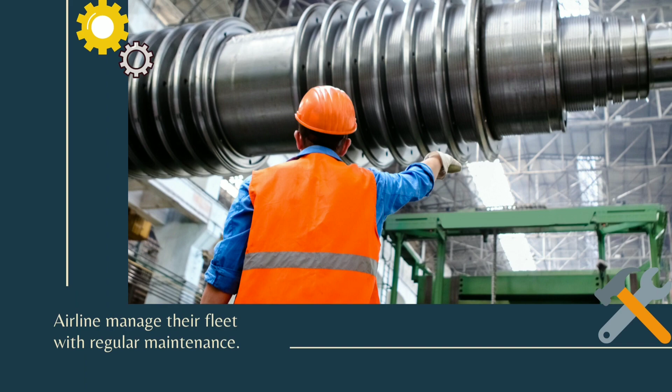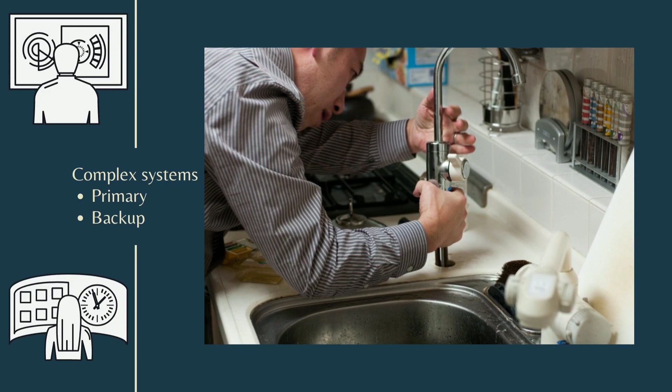Maintaining an aircraft is a never ending process. It is easy to forget when you board a jet aircraft that what you are stepping onto is one of the most complex machines ever created. Every airplane is a tuned machine that has primary systems and backup systems that allow the aircraft to fly increasingly long distances and to be one of the most efficient technologies ever built.

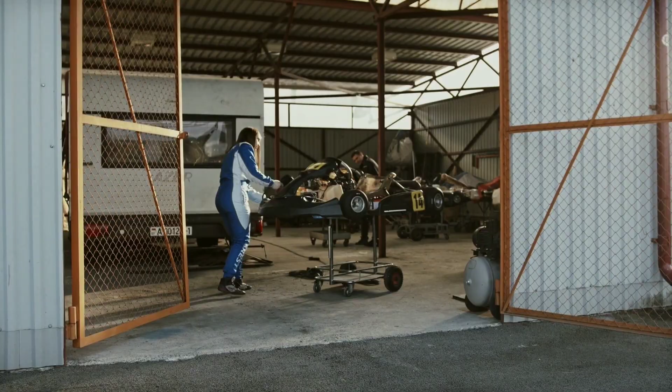So, friends, let's talk about aircraft maintenance checks. They are periodic inspections that have to be done on all commercial and civil aircraft after a certain amount of time or usage. As any technician knows, every aircraft receives its maintenance around the clock. Airlines and other commercial operators of large or turbine powered aircraft follow a continuous inspection program which includes both routine and detailed inspections. Airlines and other airworthiness authorities like DGCA casually refer to detailed inspections as checks.

Checks are commonly of the following types: A check, B check, C check, and D check. A and B checks are lighter checks, while C and D are considered heavier checks. Aircraft operators may perform some work at their own facilities, but often checks, and especially heavier checks, take place at maintenance, repair, and overhaul company sites, that is, MRO sites. Let us discuss each of the checks in detail.

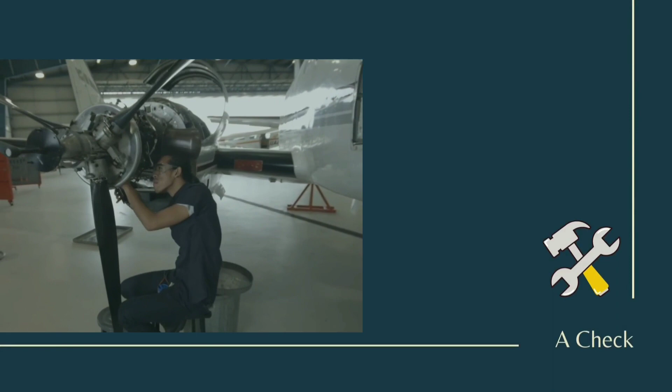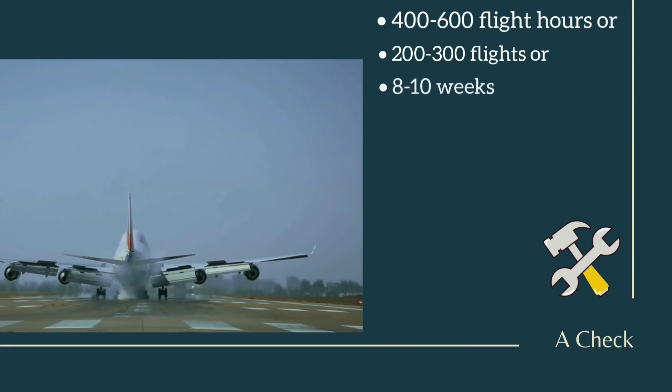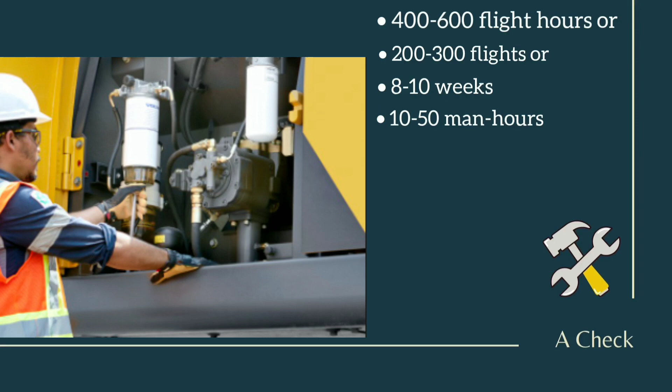A check. The A check is performed approximately after every 400 to 600 flight hours, or every 200 to 300 flights, or every 8 to 10 weeks, whichever is earlier depending on the aircraft type. It needs about 10 to 50 man hours and is usually performed in an aircraft hangar. The actual occurrence of this check varies by aircraft type, the flight cycle count, or the number of hours flown since the last check. The occurrence can be delayed by the airline if certain predetermined conditions are met. The A check takes about 24 hours on a narrow body aircraft.

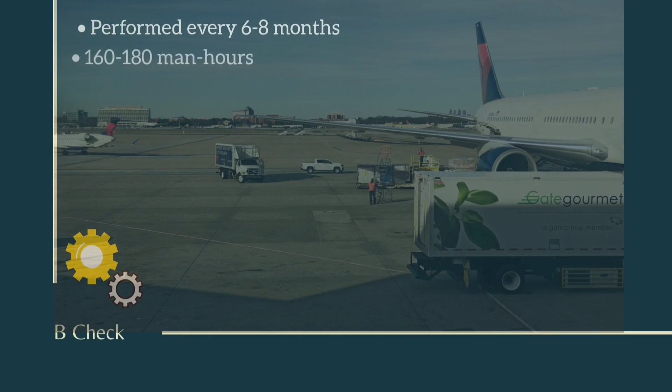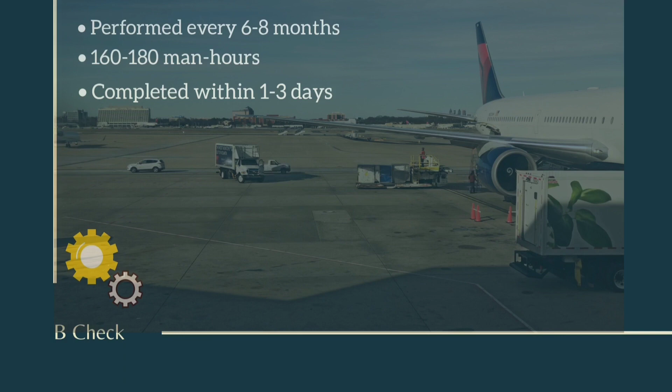B check. The B check is performed approximately every 6 to 8 months. It takes about 160 to 180 man hours depending on the aircraft and is usually completed within 1 to 3 days at an airport hangar. A similar occurrence schedule applies to the B check as to the A check. B checks are increasingly incorporated into successive A checks, that is, checks A1 through A10 complete all the B check items.

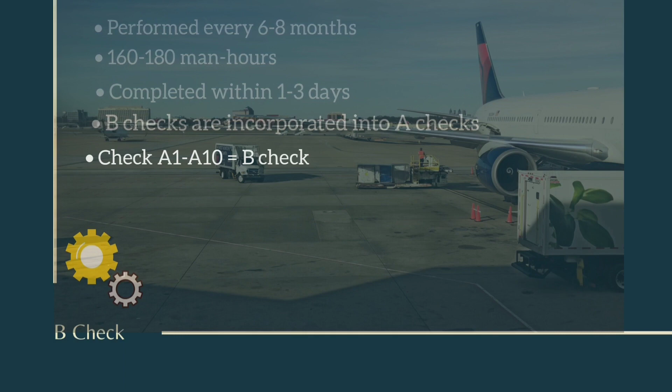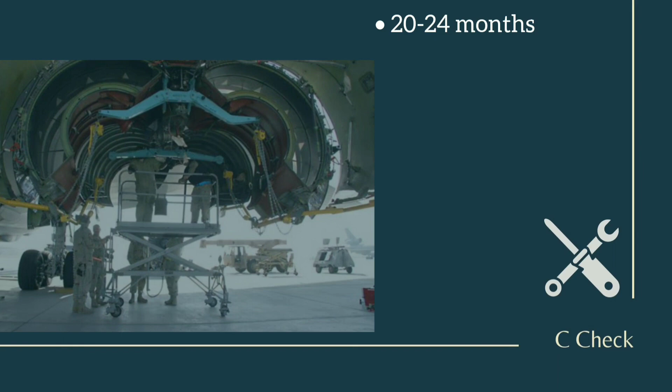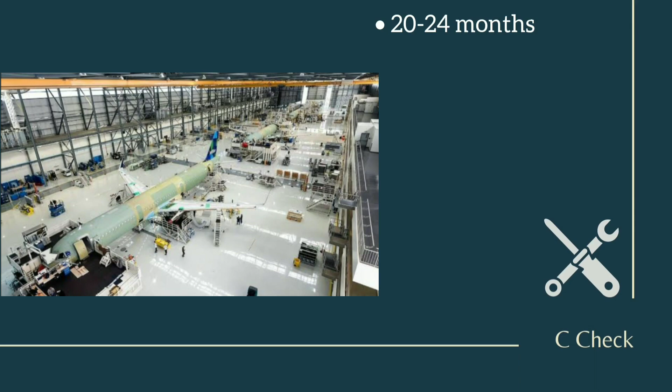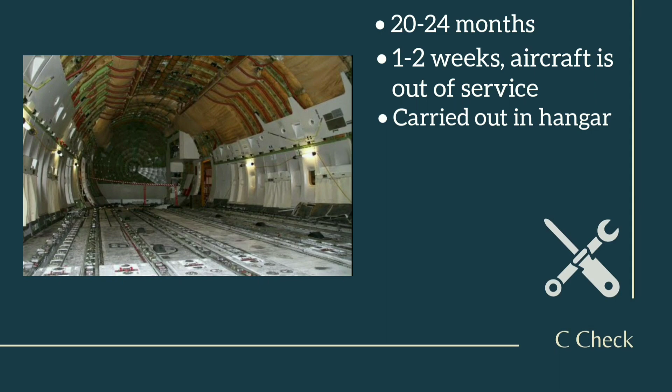C check. The C check is performed approximately every 20 to 24 months or a specific number of actual flight hours or as specified by the manufacturer. This maintenance check is much more extensive than the B check. It requires a large majority of the aircraft's components to be inspected. This check puts the aircraft out of service for 1 to 2 weeks. The aircraft must not leave the maintenance site until it is completed. It also requires more space than A and B checks. Therefore, it is usually carried out in a hangar at a maintenance base. The effort needed to complete a C check is up to 6,000 man hours.

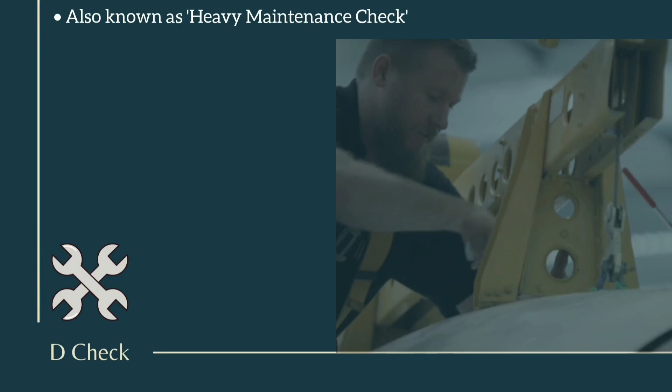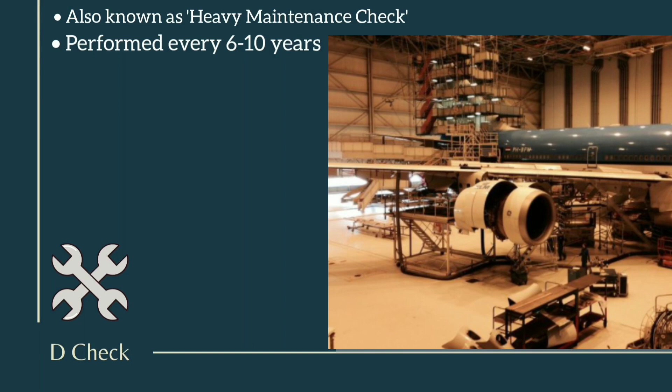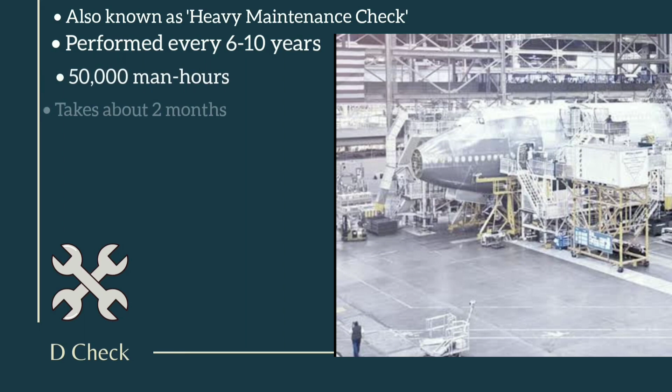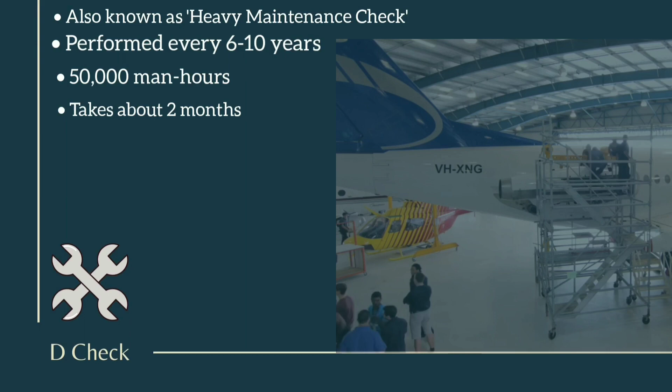The D check, sometimes known as the heavy maintenance check, is by far the most comprehensive and demanding check for an airplane. This check occurs approximately every 6 to 10 years. It is a check that more or less takes the entire airplane apart for inspection and overhaul. Even the paint may need to be completely removed for complete inspection of the fuselage metal skin. Such a check can generally take up to 50,000 man hours and 2 months to complete depending on the number of technicians involved. It also requires the most space of all maintenance checks, and as such must be performed at a suitable maintenance base. Because of the nature and the cost of the D check, most airlines, especially those with a large fleet, have to plan D checks for their aircraft years in advance.

Some authorities use a type of check known as the 3C check or intermediate layover, which typically includes light structural maintenance, including checks for corrosion or checks on specific high load parts of the airframe. The 3C check may also be used as the opportunity for cabin upgrades, for example, new seats, entertainment systems, carpeting. This shortens the time the aircraft is out of service by performing two distinct tasks simultaneously. As component reliability has improved, some MROs now spread the workload across several C checks or incorporate the 3C check into the D checks instead.

So, I hope that you enjoyed learning about the basic concept of maintenance.